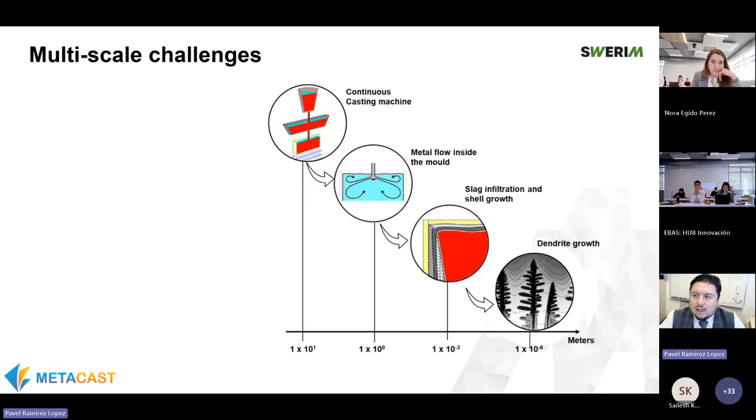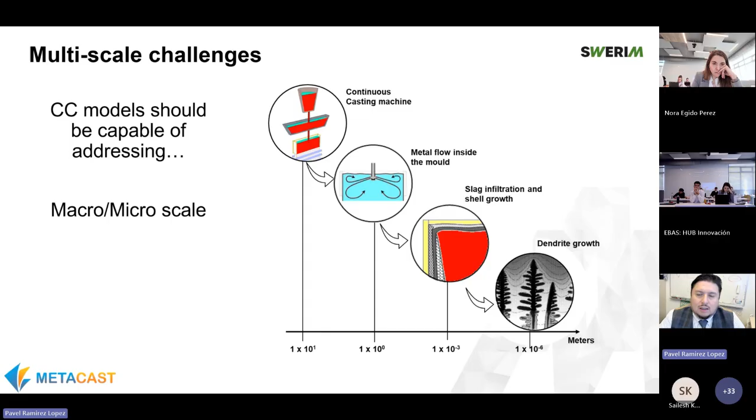And today the objective is the same: just give you a very general idea of how modeling is used for solidification, and in particular for modeling of casting solidification. And just as in the morning we were discussing, there are multi-scale challenges, of course, in order to do research on solidification and casting, but also to model solidification and casting. Continuous casting models should be capable of addressing the macro and micro scale, plus the complex physical phenomena that happen during this whole chain.

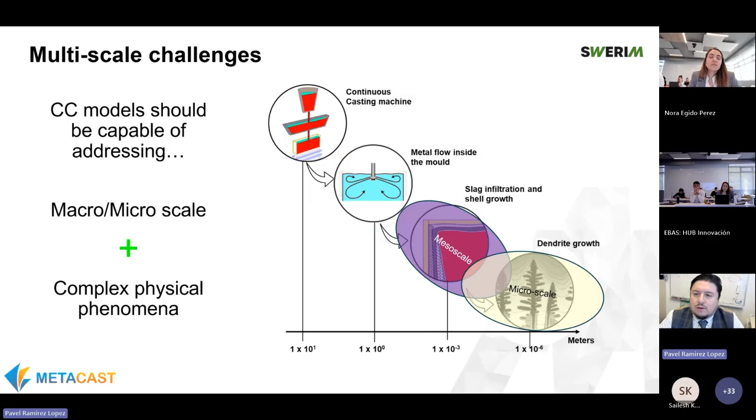What we can define as microscale is whatever is happening between 10 to the minus 9, 10 to the minus 6, all the way to 10 to the minus 3. So basically from nanoscale all the way to micro scale or millimeter scale. Then we have what is happening at mesoscale, which is already taking part of the connection with the micro and going all the way to the order of meter in scale. And largely, we address the scale of the casting machine with models such as CFD and FEM.

So you can see here that there is no model that really covers the whole range, or not at least in a practical manner that we can solve all the scales at once. So very often we end up focusing on specific models for microscale or a specific model for mesoscale. And now a very rich ground for research is the interconnection between these models, like how you connect CFD or FEM with mesoscale modeling, how you connect mesoscale modeling with the further microscale, and so on. In fact, this is part of the research going on in Shellcrack, so probably Nils and Sailesh will address that later on.

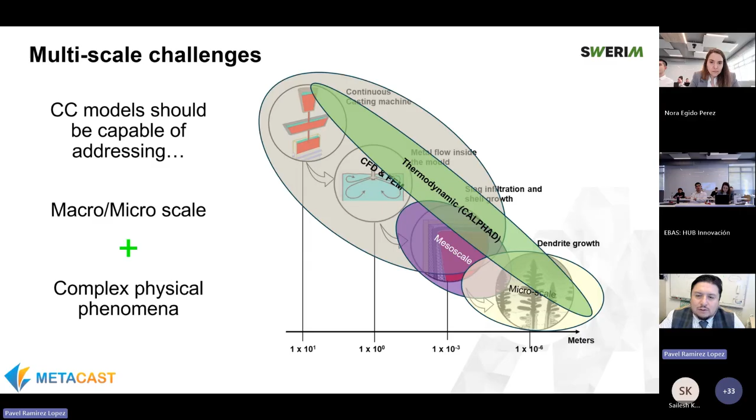Regardless of this, thermodynamics happen everywhere, so we need thermodynamics over the whole range. So it's very important to see that there are specific ranges for each model to operate. In the same way, not all models can address all the phenomena, and this is due to the multiphysics nature of the problem in casting. So to joke about Lord of the Rings, there is no one model to rule them all.

And the issue with that is that we tend to think that the tool that we use, let's imagine we are a specialist on CFD, can solve everything from that approach. And that's mostly not the case. We need a combination of tools, and very often we need specific tools for the tasks.

Such examples could be the meshless methods, which are very appropriate to deal with granular flows, bubbles, and inclusions. Granular flows can easily be found in casting, for example, in how the casting powder moves, with the big differences in performance between casting powder in powder phase or in granules, and definitely non-Newtonian behavior, which is very hard to model with methods other than the discrete element method or meshless methods. For multi-phase flows, steel, slag, gas, heat transfer, very often solidification at macro scale and electromagnetics, CFD is the preferred method of choice.

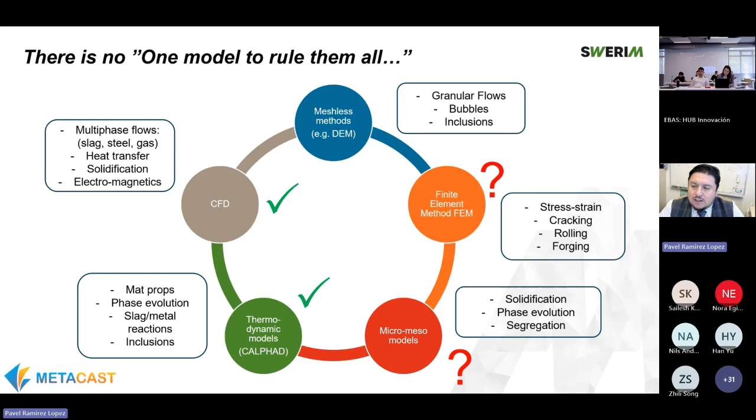Finite element is typically used to solve the status of stress and strain in the strand. Of course, this will lead us to cracking and eventually to understand better the end use of the product, like rolling and forging to produce sheet or plate. In terms of microscale, we focus very much on the solidification evolution, the segregation, and of course the properties that we will achieve depending on the microstructures that we discussed this morning.

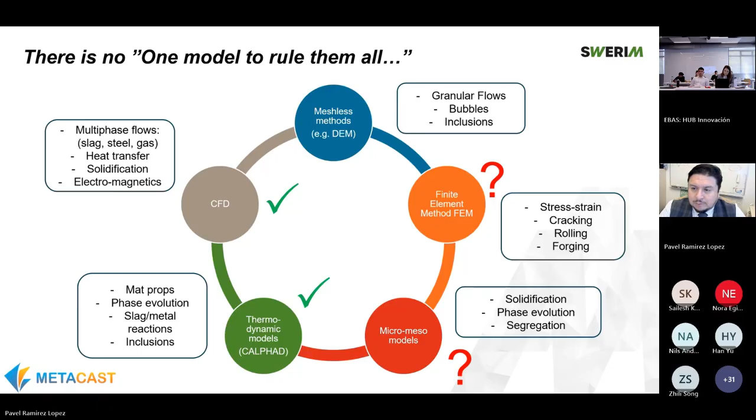So the modeling approaches can be various, but I try to put all these in this triangle of influences. And we see on the left side that we can address with CFD things like modeling the stopper and the SEN, the argon injection, flow modeling at very accurate behavior of the turbulence. And this pretty much will describe the flow dynamics in the system.

And talking to our students in the morning, I was telling them that the definition of casting is extracting heat from a melt to form a solid. And here we see the three components: the melt, represented by the flow dynamics on the left side, the heat extraction that you have on the right side. And very often we need to understand very clearly what kind of properties and phases we observe. And we do this often with CALPHAD and finite differences, and finite element as well is used.

And finally, the solid formation, which is very strongly dependent on the coupling with the cooling rate that we discussed this morning. Then we end up with this combination of fluid dynamics, heat transfer, and solid behavior that, in the best case scenario for our castings and for our processes, leads us to a good product. But when any of these three components is failing, or we are not doing appropriately in any of these three, we lead to the formation of defects. And hopefully we have the chance to have another final session where we will explore these defects in more detail.

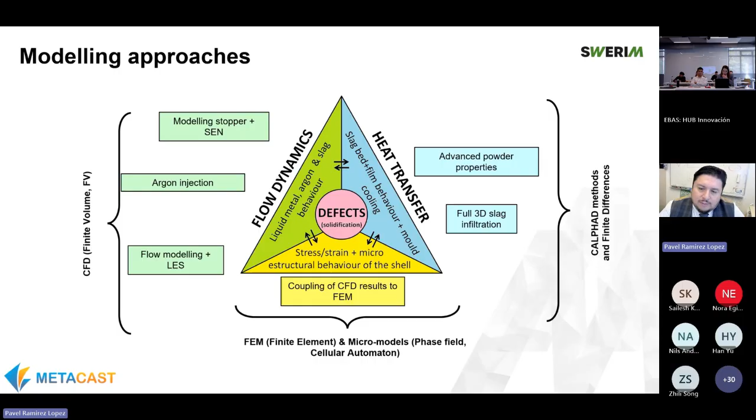So now, without further ado, I have also a quick modeling timeline. And this I would strongly recommend. I didn't put here the paper that we just recently published with our group on Metacast with Michele De Santis as leading author. So I would recommend, Michele, if you have the chance to please post the link to the open publication, it will be fantastic, so they could look at the results from Metacast and have a read on this background on modeling. And also we did the mapping of expertise of modeling in Europe in casting.

But to summarize quickly, we saw already from the 70s and 80s, with the advent of personal computers, a first generation of models. And these are the classic models that we have seen from Brimacombe. We have seen also the classic model from Pritchard, very often based on thermocouple data, where we do a backfitting of the heat fluxes in the system, and then we are able to do a qualified guess on what's the shell growth and what would be the thicknesses as we progress in the casting machine. So these were in the 70s the beginning of the modeling of casting and solidification.

Then further on in the 80s, with the addition of the CFD approach and the different approaches for solidification, we could see already publications by Professor Thomas, Julian Szekely, and the other teams, von Wohler and so on, to model solidification in the 80s. Further on, with faster computers in the 90s, we can see a huge progress in multi-phase applications. For example, now we can see the effect of bubbles and inclusions on the simulations, combined with the calculations of solidification and flow in the past decade.

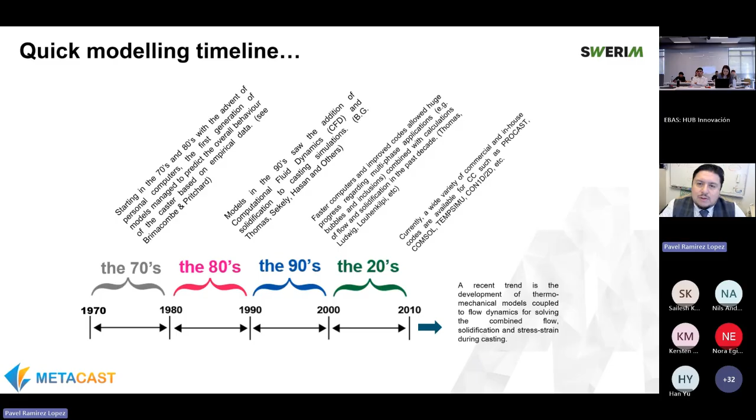But what is the trend now? Where are we going now? The recent trend is that thermomechanical models are now coupled with flow dynamics. So what I was mentioning about CFD and FEM being separated is not true anymore. We are now having monolithic solvers that are capable to address flow dynamics, solidification, and stress-strain due to solidification in a complete, more holistic way. Amongst these, I can mention perhaps Physica in the UK. I can mention, of course, Thercast from Transvalor in France, and there are plenty of initiatives trying to go into that direction. So this gives you a panorama of the modeling tools available nowadays.

And without further ado, I will try to map a bit of what is the approach in microstructure modeling. In this case, we discussed this morning about the fundamentals of solidification. We talked about nucleation and growth, and we are trying with the microstructure modeling that we do to reproduce the formation of grains, dendrites, and the different phases we encounter. Often also we want to understand segregation and the formation of porosity.

So at present we have, again, I'm not trying to be exhaustive in this review, but we can group it into three: the deterministic methods, the stochastic methods, and I will add on the mesoscopic methods, which are working in a bit higher scale.

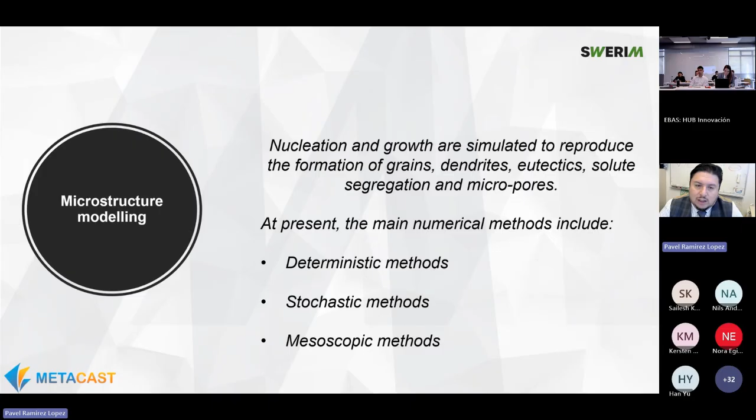As a quick example, let's remind us the ingot that we've been looking into in the different presentations and the slides today. So we are trying to understand, let me bring my pointer, we are trying to understand what's the evolution in terms of transport of heat and solute as we proceed in solidification, in order to be able to understand where we have, for example, columnar growth,

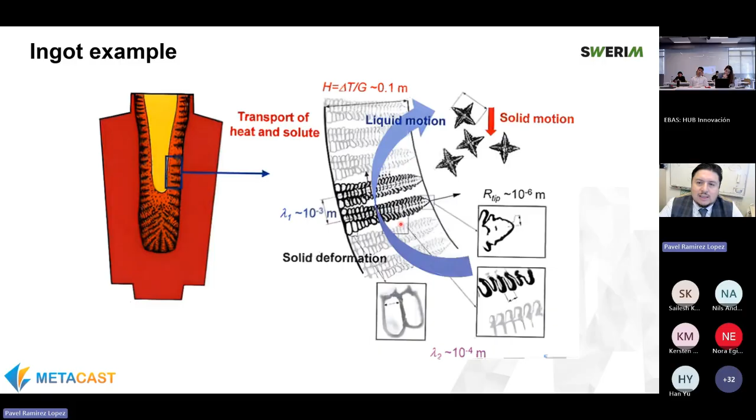where we have this transition to equiax, what's the fraction of equiax we have, and what's the influence in many cases of these thermosolutal convection currents that we saw in the videos before the lunch time. So that's, let's say, setting the scene on what we are trying to achieve.

And in case of deterministic modeling, well, it's first of all based on classical solidification kinetics and crystal growth characteristics. So in this case, the functions such as crystal nucleation density and growth rate in the melt are derived, and they can describe the change in density of nucleation and

dendritic growth, but they won't be as specific as to where this is happening, but it would be some sort of average approach. And in this sense, we have three types, which are the most common, and they are the mixture theory, the volume averaging, and the ensemble averaging.

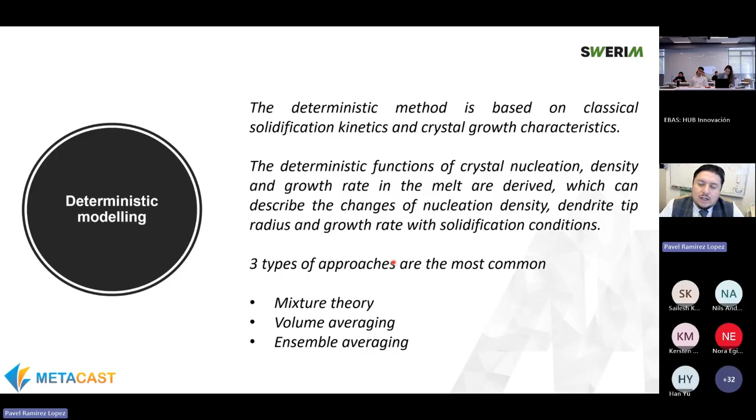I will start first by mentioning what's the fundamental for this approach, which is the representative volume element. So let's consider the volume element, which is located in the mushy zone. For those who haven't attended the session in the morning, we had a quite intense session where we looked at a lot of videos where we were trying to understand what is the behavior of the solidification front, how we have a mushy zone and interdendritic liquid in between, and what the representative volume element is trying to portray is some sort of average representation.

If we look at it, in this case from the top, as a cross-section, we are trying to represent what is happening in detail in all this picture by taking just roughly a percentage of how much of this area is covered by solid, how much is covered by liquid, and then make this a representation of the solid fraction. If we translate to 3D, then we will have here a representation of the volume.

You can do it in 2D as well, and in general, this RVE will be defined by the size of the mesh that you are operating with. But I will come to that in a second.

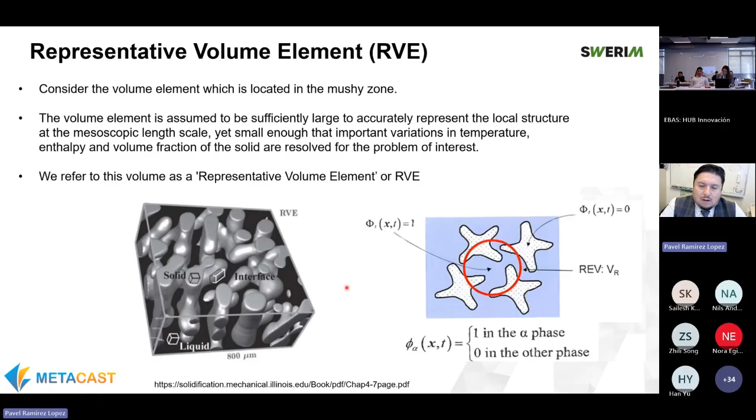So one way to draw parallels between what happens in real life, and you remember this diagram in the morning where we had the solidification range between T liquidus and T solidus. We have this whole set of temperatures in between: zero strength temperature, liquid impenetrable temperature, and the zero ductility temperature. So this is real life, what you see here.

In a deterministic model, you don't see that level of detail because you are only applying the equations that describe the general growth, not the specific growth in certain positions. A good example of this is the lever rule type of model that we use in Fluent to describe the solidification based on the isotherms between T liquidus and T solidus.

We can also define in Fluent, for example, the ZDT, which will help us to define what's the pulling velocity. So in this case, we will say to Fluent, whatever comes to this point, it will be part of the movement of the shell and it will be pushed out. And that would be obviously the casting speed. But everything in between, we have only the information as a gradient. So this is the classic way to describe a deterministic model.

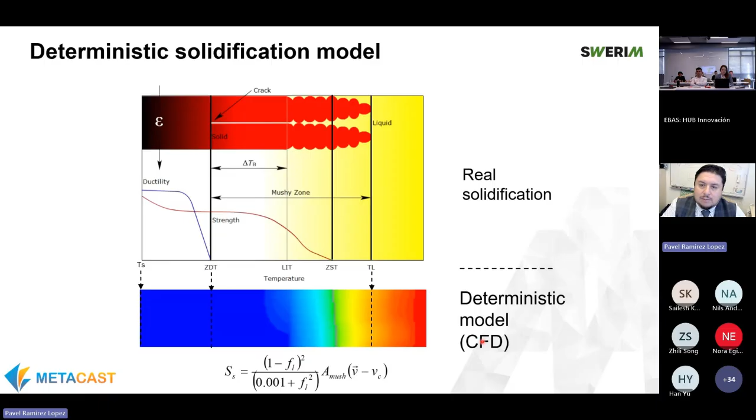So what are the limitations of it? Here I have a very interesting publication by the group of Combeau. So it is possible to use deterministic models to try to address things like liquid pool depth, the shape of the mushy zone.

Of course, it's harder to take into account grain motion, and that's why I take this publication as an example, because it's an effort to portray this grain motion and the transport of grains. As you saw in the previous videos, the actual transport of grains can also act as nucleation sites when you break off a dendrite arm, for example, and it becomes a nucleus for a new grain and so on. So portraying this is actually very challenging in a deterministic model.

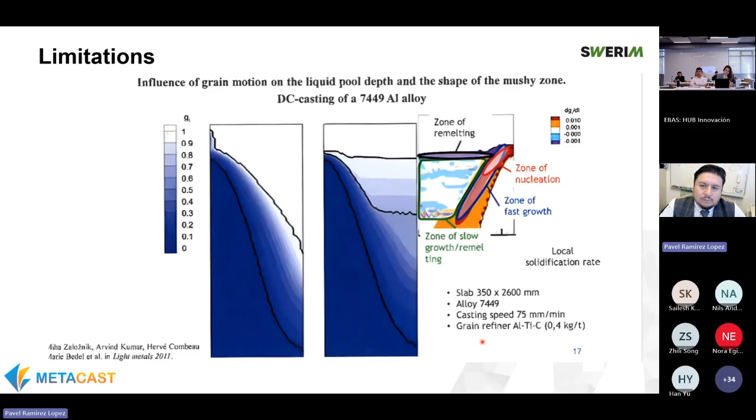So what are the pros and cons? Well, the pros are that they are fast because we are not resolving the whole microstructure, but we get a really good view of the overall performance. They are easier, well, I wouldn't say easy, maybe I should correct here. They're easier to code than stochastic models, and they require relatively low computational time.

So as long as we know the heat transfer profile in our casting, it is possible to make a prediction with a deterministic model. And it is very ubiquitous, so as you could see, we use it in Fluent very often in our digital twin to predict the solidification. And from there, you can go Scheil type, you can go lever rule, and you can go everything in between. So they can be modified in a more or less rapid way.

What are the cons? Of course, it is not possible to describe random phenomena due to solidification. We see that solidification is very random. We were just chatting with our students at the end of the session, and one of them was saying, yeah, but I never thought that there were so many considerations when we have, for example, snowflakes. And we ended up discussing why snowflakes are different from each other. And it's because the events of every nucleus that later became a snowflake are different.

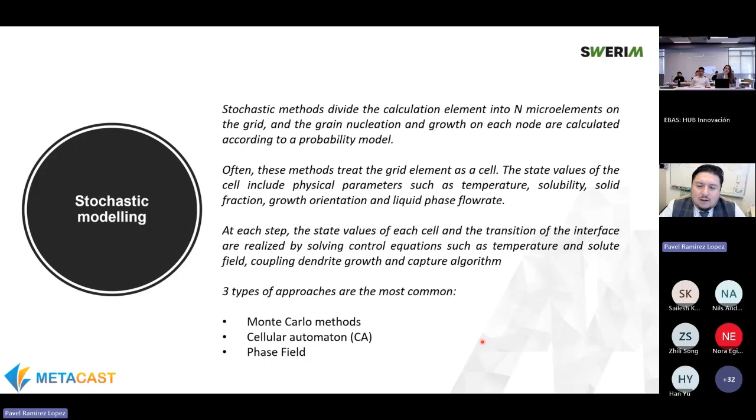We have three general types, I would say, again, it's not an exhaustive review: Monte Carlo methods, cellular automaton, and phase field. If I'm correct, Nils and Sailesh will talk a bit about phase field with the work we are doing in MICRESS. And to give you a good example of how it works, I will talk about cellular automaton.

So cellular automaton is a model that simulates the process of liquid turning into solid, the solidification part, but is based on a grid of discrete cells. So each cell state is determined by simple rules.

So you remember I was telling you about Pac-Man, or maybe we can talk about Chinese checkers as well. So basically, we have a grid where they jump to the next position based on a very simple set of rules, which is what actually defines the solidification rules based on its neighbors, and they mimic processes like nucleation and crystal growth.

And this approach is rather efficient because you only need to track the interface as it is being formed. Here you have two approaches on how to start, and how the advancement of this solidification front happens. And in fact, these very simple rules create a lot of complexity. So here you have on the right side a dendrite, which has been predicted with a cellular automaton model. And it's pretty much like nature.

So I would say simple rules, for example, if we think about a tree in nature, the rules are rather straightforward. For example, as long as we have this root of the branch, and the branch grows half a meter, divide into two branches. And every time that it grows 30 centimeters after that branching, divide into two. And we see that these very simple rules in nature very often lead to complexity. And that's exactly the case with a cellular automaton.

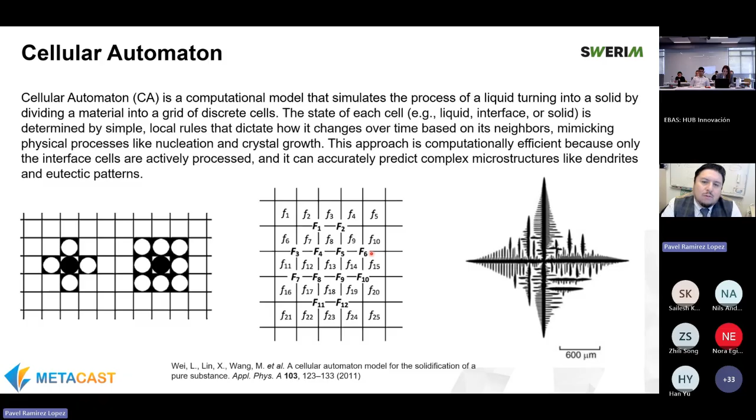Very simple rules for moving from one cell to the other can lead to complexity when they interact with the heat transfer profile, but also with their neighbors and with the overall process conditions. I have some cellular automaton videos to show you what I mean with that competitive process.

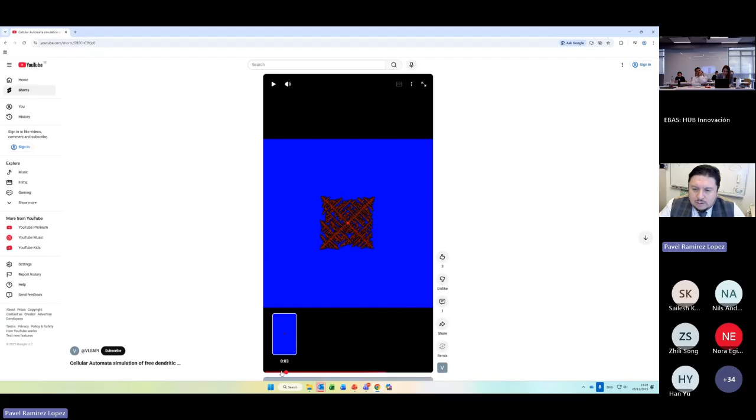Here we have, for example, I hope you're able to see my screen. Please let me know if you don't. Yes, we see.

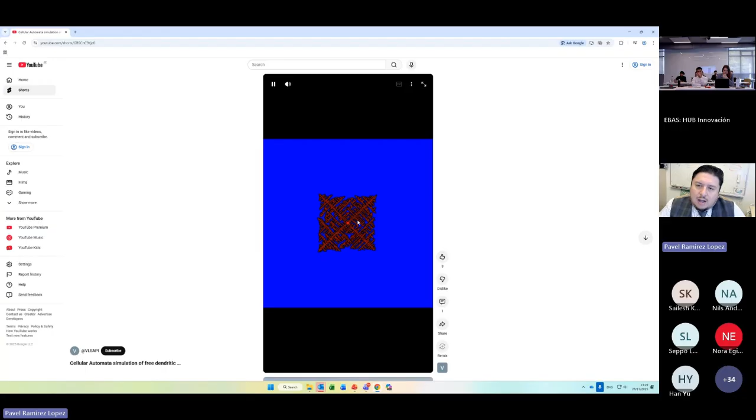Yes. So in this very competitive process, we have simple rules. For example, we have here a dendrite growing in the four directions, and we have the primary arms growing, and each arm is growing secondary arms, which interact with the rest of the dendrite. And at first, it seems rather simple, but as the solidification proceeds, we see more and more complexity as the arms interact with each other.

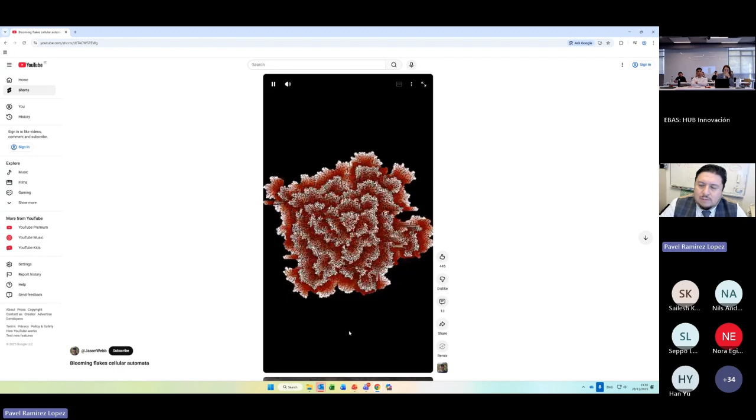If I do the same with the next video, give me 1 second, right here, we can see that the same rules, depending on the anisotropy factors that we observed in the previous solidification session in the morning, can lead to extreme complexity depending on how they interact and the patterns that form at the end. And this is just based on this, you can call it Pac-Man or Chinese checkers game, of how the solidification moves from one cell to another.

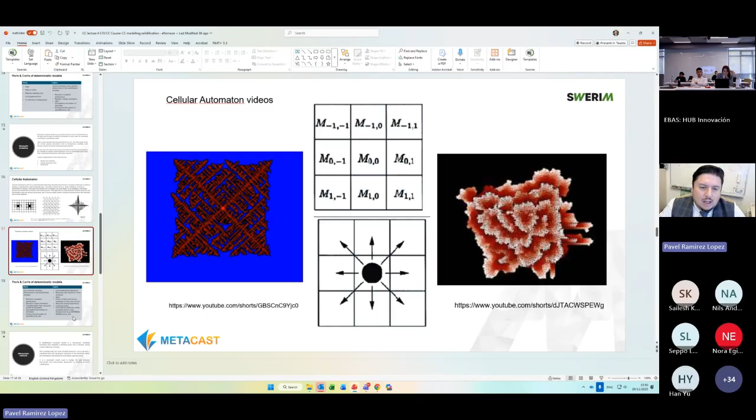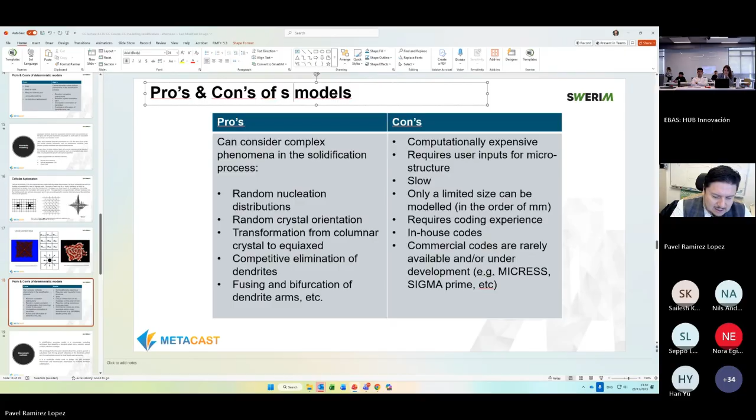So what are the pros and cons of deterministic models? Well, the pros, they can consider complex phenomena in the solidification process. So everything that we miss from the... sorry, and here should be stochastic. Just correct it as fast as I can.

So random nucleation distributions, random crystal orientation. We can find the CET, the competitive elimination of dendrites, and the fusion and bifurcation of arms. So all these phenomena we can capture with a stochastic model. Sorry, it was not deterministic, stochastic.

What are the cons? Well, they are computationally expensive, of course, because as you can imagine, producing this kind of cellular automaton per dendrite or per nuclei in the whole domain, especially when you're looking into bigger casting sections, is computationally very expensive. It also requires user inputs for microstructure.

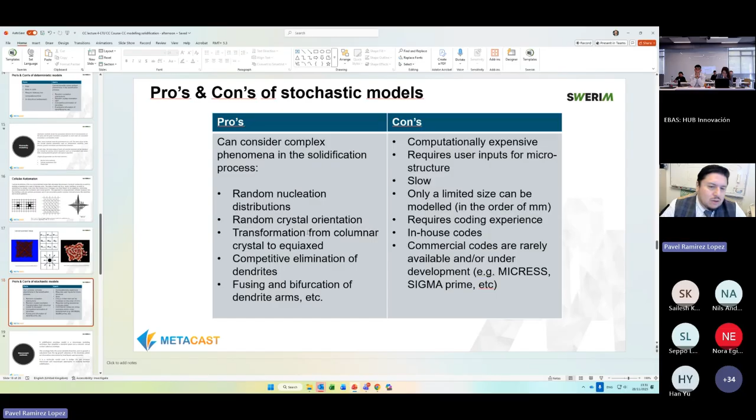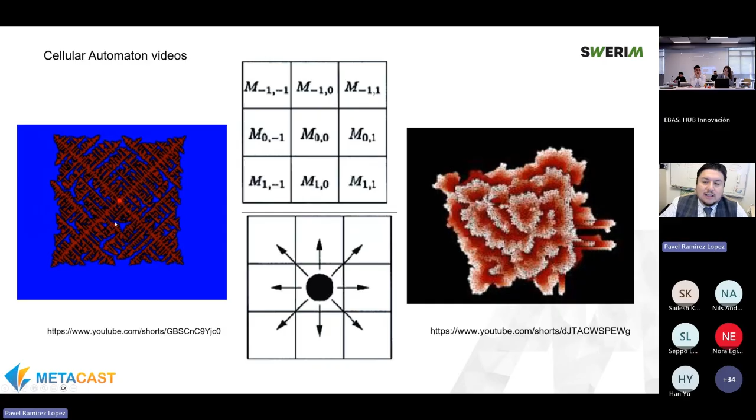So in this case, for example, of this figure, let me go back and swap. So in this case, we determine based on previous microstructural observations for these specific alloys, we know what's the anisotropy, we know what are the preferential growth axes for this specific dendrite. So we have to predetermine these in our models. So it's hard to really do from scratch a prediction which is accurate unless we have prior knowledge of the microstructure. So basically, we require user inputs for microstructure.

It is, of course, slow because we need to grow the structure from scratch. And very often, it means that we have to limit our calculation domain to the order of millimeters. It also requires coding experience. The number of available codes for this is limited. However, there are codes that are addressing this. MICRESS is a good example. I think Sailesh will probably talk a bit about it later in the shell crack session.

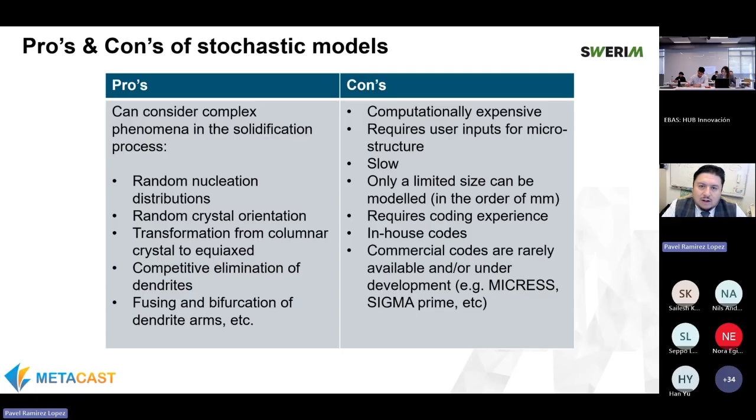Then I will move now into the mesoscopic method. So the mesoscopic, as you saw, they are falling in between the macro scale and the micro, and they are addressed for bridging this gap in terms of calculation from the micro to the macro. And so for this, they are designed to be faster.

And the approach is to use typically an envelope that simplifies the dendritic grain into a smooth virtual surface. This envelope links the active dendrite branches, and its growth is calculated from the tip growth velocity of the dendrites, and these are themselves determined by the local liquid supersaturation. It is a multi-scale model, and as I mentioned, is for bridging the gap between micro and macro.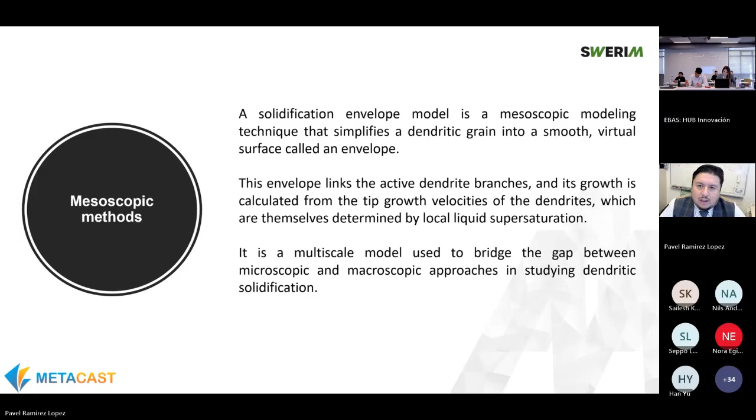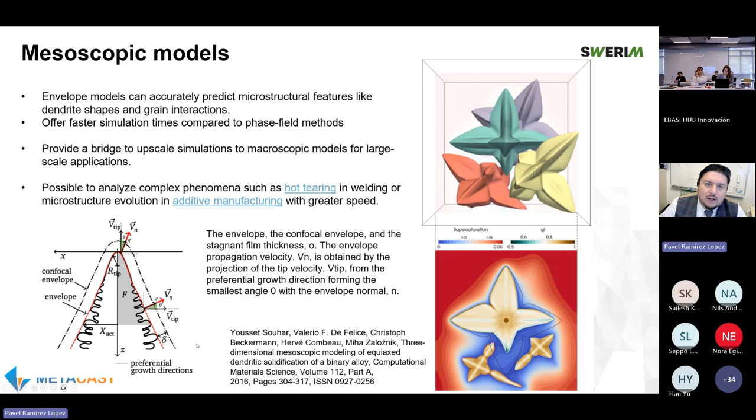Finally, I don't know how am I doing on time? Yeah, I have a few minutes more. You're good.

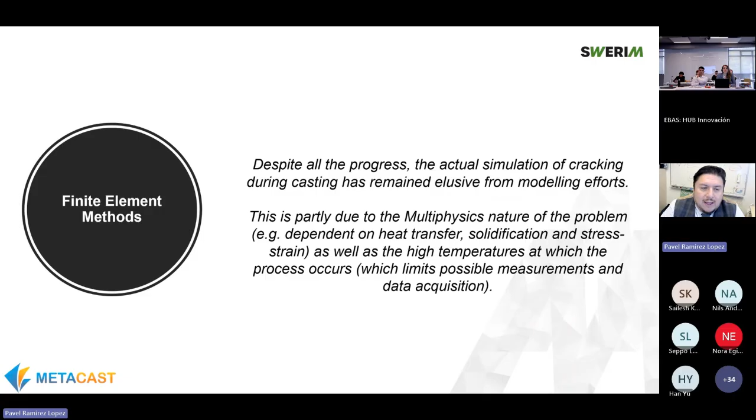So finite element methods. I decided to include finite element methods because they are very important for casting. But despite all the progress, the actual simulation of cracking, and very often combining with solidification during casting, has remained elusive from our modeling efforts. This is due to the multi-physics nature that we described at the beginning of this lecture. The problem is dependent on the heat transfer, solidification, and stress strain. And of course, with the high temperatures, which limits what kind of possible data we can acquire. I think shell crack in this case is trying to bridge that gap too.

So, hello? Nothing, Pavel. Go for it.

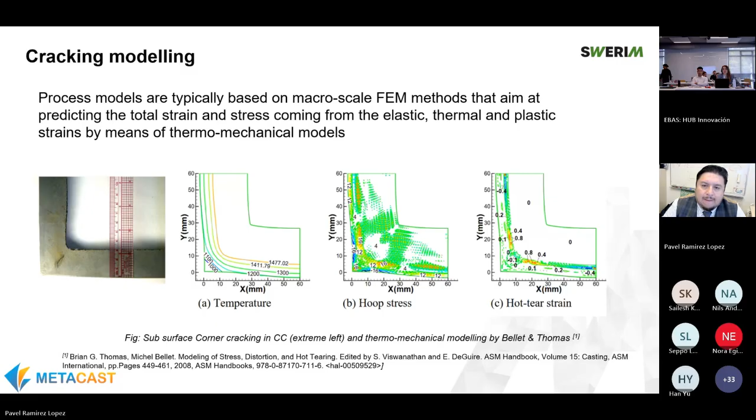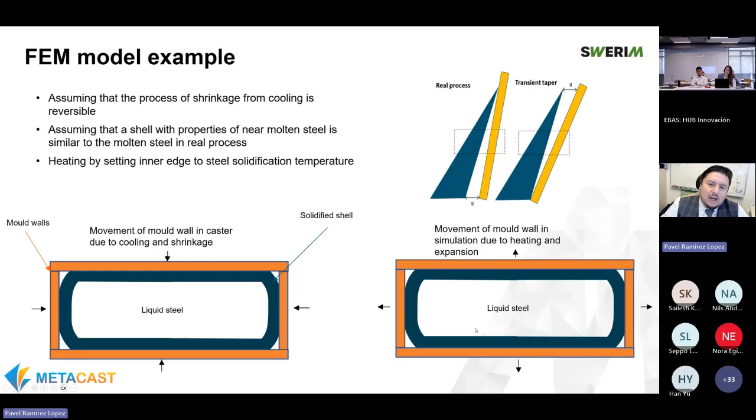From our side, at this very moment, I would like to bring up a FEM model example where we are taking the shells in a similar approach as taking these breakout shells, assuming that the shrinkage from cooling is reversible. So it's a very controversial approach, but it helps us to set easier boundary conditions for shell growth and shell resistance. In this case, we take it as a 2D slice, but this 2D slice is basically going upwards or reversible, and then we are moving the mold in according to the actual taper for the wide side or for the narrow side, for you who are familiar with casting.

So what we get is a very interesting simulation where we can observe, for a given shell, the evolution of the stresses as they progress. Of course, you need to think about it in a reverse way, but at the end of the day, what we are trying to understand here is the tapering conditions of the mold against the shell, and whenever we lose contact. So you see here very clearly in some sections how we lose contact with the narrow face and what this generates, which is the separation of the tip from the wall.

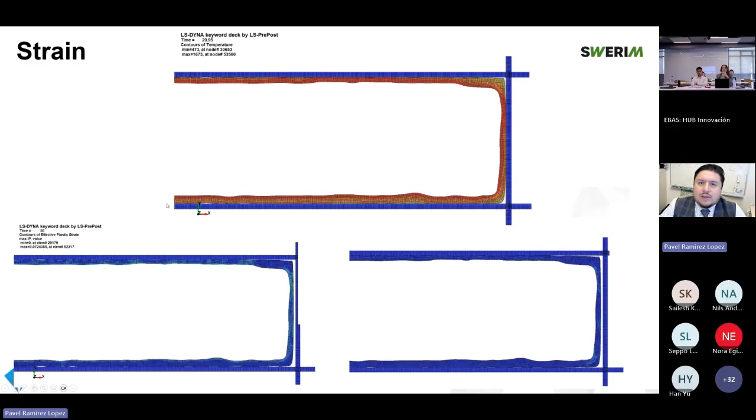So this is in terms of strain, and it helps us to understand better, for example, when we have good contact or not, the formation or accumulation of stress as a function of specific shells that we obtain either from etching, with the help of our students, for example, who have done superb work on etching samples from big slabs and have translated these shells into FEM, or from our digital twin calculations in Fluent, for example. We are able to extract these shells and put them under this reverse modeling approach.

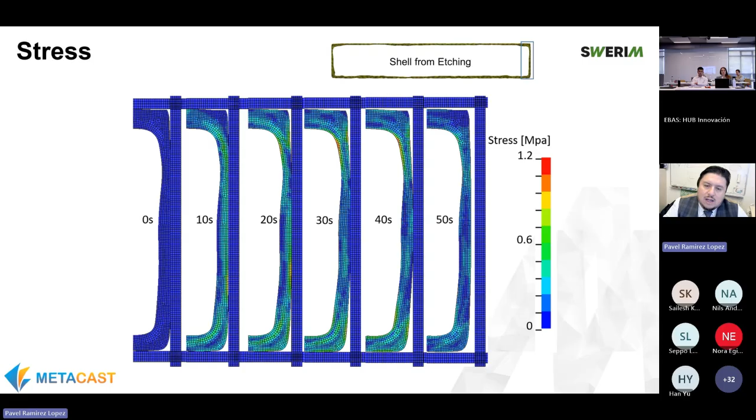I think I'm spot on, so I have 5 minutes more.

Just to summarize, in terms of microstructure, we have seen today that we have 3 scales at which we are trying to address solidification and casting. We have the microstructure scale, the mesoscale models, and the macro scale. In the microstructure, we are trying to have high resolution to predict what the structures are during solidification. It should be coupled with Thermo-Calc and the properties. And very often we focus on small computational domains in the order of microns. They often have a high computational cost.

And that's the reason we are trying to couple them with mesoscale models, which are capable of predicting the fluid flow as well as the solidification part, but they have more potential to be applied to industrial scale problems because they have a more moderate computational cost. They lack features, but they are a good compromise compared to the microstructure models. I'm not saying that we should apply only mesoscale. I'm saying we need a combination of both.

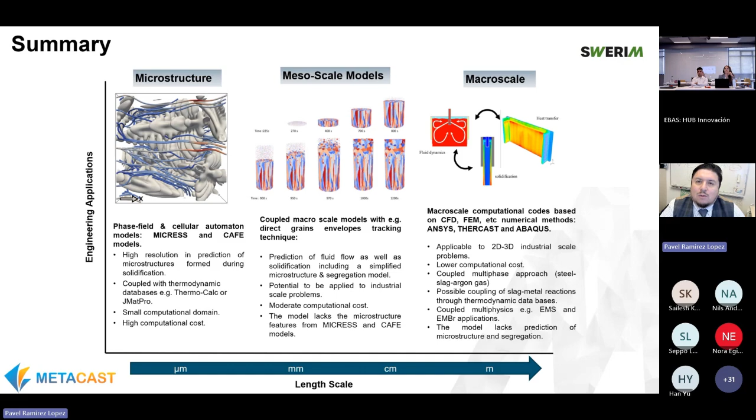And finally, in the previous sessions, and I think also in the Spanish lecture that we had some months ago, we talked about the CFD and the macro scale model. We know that it is very applicable to industrial scale, and the computational cost is lower depending on what kind of multi-phase phenomena we are addressing. And it's possible to couple it with slag metal reactions with the thermodynamic databases. It is also possible to add multiphysics like EMS, argon injection, and so on. But we miss a lot of information in terms of microstructure and segregation. So we need to cover pretty much all these scales to address many of the issues in casting.

But before pressing any button, and just as a final example of what we are trying to achieve here, it is necessary first to define the outreach of the modeling. What are the needs? What are the expectations from the analysis? Because modeling requires significant resources in terms of hardware, software, and manpower.

And I always use this example from operations research, the survivorship bias example from the Second World War, where the U.S. was trying to enhance the durability of their planes. They were having losses, and one of the decisions was to put better armor or more armor on the planes. And the approach was to see where the planes had more bullet holes, and then decide to cover these sections. When they analyzed planes which were coming back with bullet holes, they decided, well, maybe we should

put the armor here. And in fact, this is a wrong approach, because the planes that were able to come back had holes in the sections where they could survive, because they were not critical. So you can see that the planes that were hit in the areas without bullet holes were the ones that didn't come back. So this is an example of how the problem setup can lead to false approximations of the problem that you want to solve.

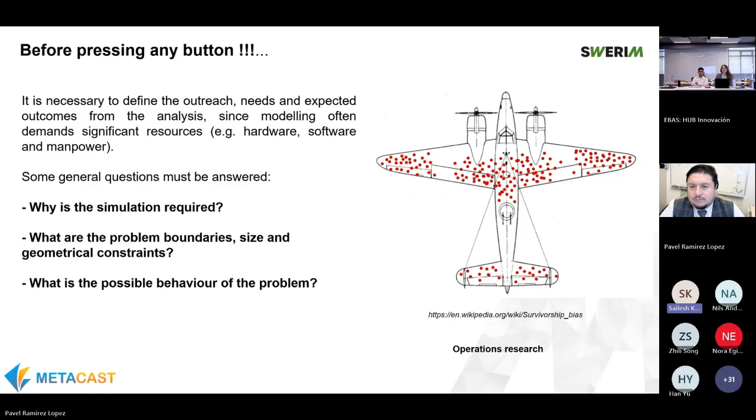Yeah, I hope I'm spot on 15. Thank you so much, Pavel. Maybe we can have one question, and if there are more questions, maybe we'll take them at the end of the session.